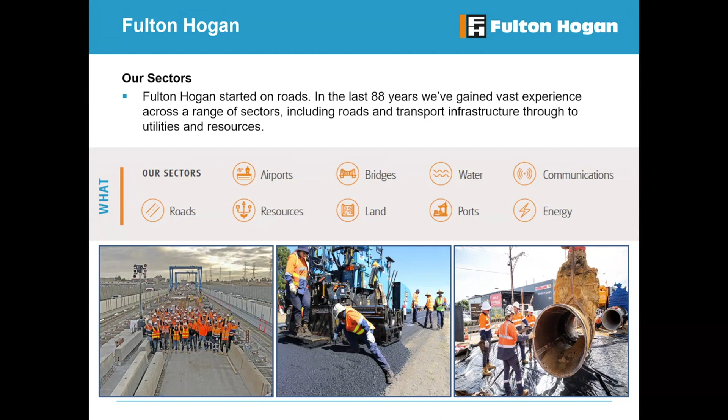CICA represents, as an industry association body, we have a national footprint with members from around the country that encompass crane owners or people that sell lifting services, as well as the crane manufacturers, and also the hook side of things, the rigging equipment, the rigging, slings, shackles, clutches, so on and so forth. Those providers as well make up our membership. So we believe we have a full spectrum of participants that can aid to improving safety in the industry.

One of those things that was a self-initiated program back in 2002 was the Crane Safe program, and hopefully many of you are familiar with that program. It continues to be a gold standard globally for independent third-party crane inspection itself. It's the only program that's accredited in Australia.

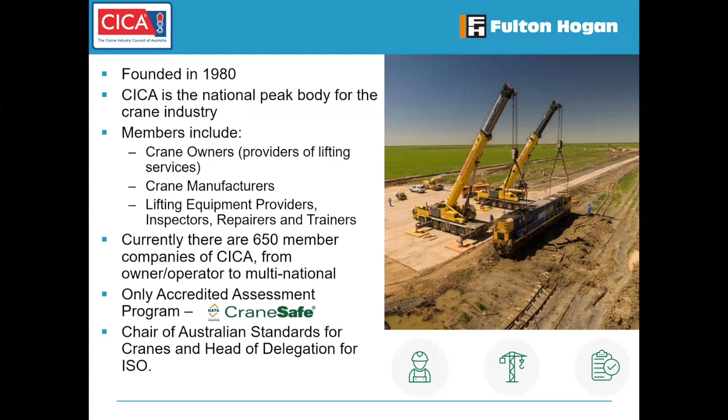With the footprint that we have in the membership for manufacturers as well as users, it's important for us to be able to contribute and raise the awareness and also the modernization of Australian standards. So we're very fortunate. CICA has the opportunity to participate at both the international level with ISO as well as being chairs of the local Australian standards, which do have strong linkages back to European and international standards anyway. I'll just jump into the specifics.

It was important for us, as Rory said, the articulated mobile crane is a very popular crane. Over 40% of the cranes that are mobile cranes in Australia are articulated cranes, but there's a bit of a legacy, I would say, in the perception. And I think that our hope today, when Tom and I and Rory looked at trying to draft this information, we want to raise your understanding of how articulated cranes or non-slewing cranes, the colloquial Franna crane, is used and perceived in the industry.

I thought it was important to start with this slide here because this indicates the legacy and probably the misconception of the non-slewing crane and the articulated crane that we'll use synonymously. So quick point here, if you can operate a slewing crane, so I've shown a license C2. This slewing crane is a little Maeda crawler crane that you might be familiar with. Most of them have a 2.8 maximum rated capacity.

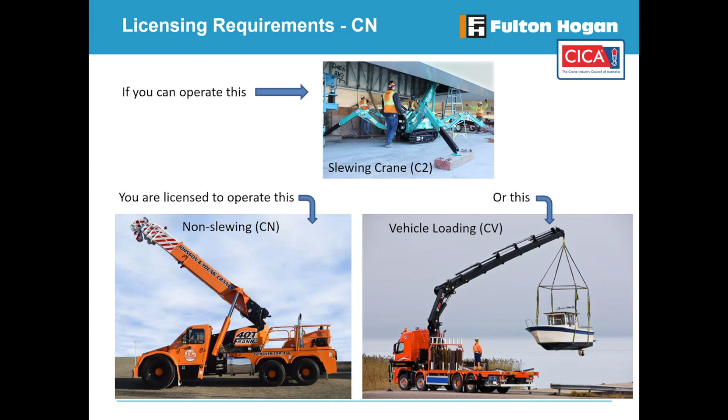The misconception in the non-slewing crane, articulated crane space begins in the licensing requirements. The fact that slewing crane licensees are legally able to operate the non-slewing cranes or articulated cranes leads to the misconception that a slewing crane operation is similar to a non-slewing crane operation. This is an area that CICA and Fulton Hogan are attempting to resolve through both the Safe Work Australia program of work around crane licensing, but also even in the current national assessment instruments, we're trying to elevate the state of questions as well as the units of competency to reflect current non-slewing cranes. We'll unpack that a little bit more in the presentation as we go.

First thing I'll do to attempt to shed a light on the differences or the variations that shouldn't be overlooked is let's look at how a slewing crane operates. What you can see in this slide, I hope, is first and foremost, it has a 360-degree rotational lifting capacity. All those numbers in that chart are ton rated capacities of a crane in that boom length and radius. If it's lifting over an outrigger, directly over the rear, or over the side, that lifting capacity is constant in a 360-degree chart.

What does that mean? Well, it means that in the course of picking and slewing, you're not changing the capability of the crane and its safety margin that's built into the rated capacity. Before we jump and compare the rated capacity chart of an articulated crane or a non-slewing crane, I just want to highlight one other point since I've got your attention.

If you see the two pictures at the bottom half of the slide, Tom and I wanted to express how adding a load to the hook significantly changes the center of gravity of the crane, and subsequently that change in center of gravity has an impact on the stability of the crane. The stability of the crane also impacts ground conditions.

If you look on the left hand here, at a minimum, you'll be able to notice that the center of gravity is rearward in vehicle position to the slew center. It's actually 1.06 meters behind, but it's also 2.4 meters high. 2.4 meters high matters when you start talking about any sort of side slope, or if you're in a barge application, the height of the center of gravity matters just as much as the horizontal displacement.

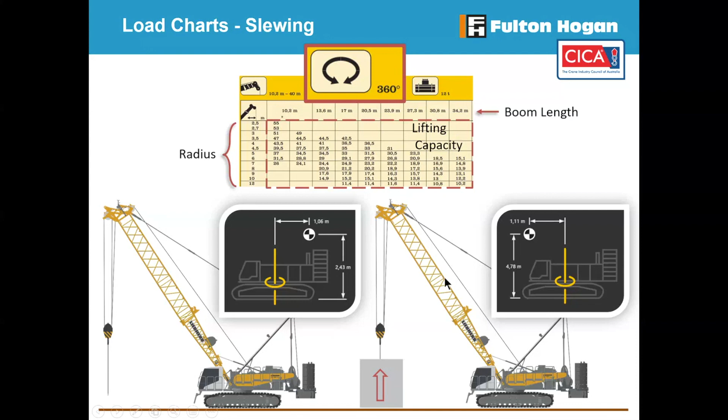The longer your boom, the higher that load center of gravity is going to impact the system center of gravity height. This is a very important thing, and these are physics that don't really care about the crane type, the job site, the state, the country, the continent, whatever. This is back to first principles, and understanding a basis for this for all cranes is very important to establish where incidents can occur and how they impact on things like ground pressure, how they impact on side slope, things like that.

Now let's shift gears, and instead of looking at a 360-degree chart, non-slewing cranes, by their nature, articulate. It would be preferable and probably easier for all of us to understand if we called them articulated cranes, not non-slewing cranes. In essence, if you watch this motion of this blue crane to the top right hand of the slide, you can see that's the full range of motion of that crane. There is not a 360-degree chart. It's approximately plus or minus 35 or plus or minus 40 degrees.

What's important in that is that articulation changes the stability of the crane, not because of ground conditions or anything like that, but because the stabilizing moment that's called out here in this top view diagram moves forward closer to a tipping line. So this top view diagram is showing that the tipping line is the front tires. In a very similar fashion, on a slewing crane with outriggers, the tipping line would be the box of the outriggers. But because these operate on tires, the tipping line is the front axle.

You can see between the straight ahead position versus the articulated position, that stabilizing moment reduces in articulation. The distance from here to the tipping line, if you can see my cursor, compared to that green line on the bottom picture, it's forward and closer to the tipping line. That reduces the stabilizing moment. What does that mean? Back to the load chart, you can see there's different rated capacities for different articulation angles.

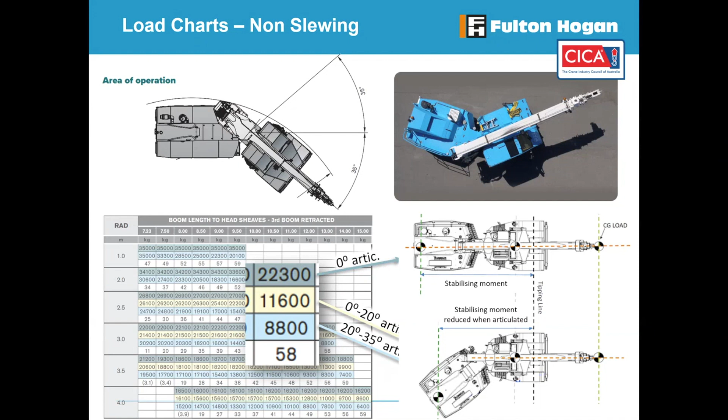And what we say to drivers out there is, tell me where you're going to go. Are you going to articulate to pick this load up? And if you are, have you considered the articulation, then the side slope? And that's the most important part. On the next video, you'll see the difference of how the behaviour of the crane and the boom happens when they get on a side slope.

Okay, so this is an indication of the crane, and pay particular attention to the block he's got. He's roped up for 4 parts of rope. That's heavily important when you're dealing with Frannas, because it does affect the chart going forward. If you have a look at the side slope, have a look at the hook block, it's out of the centre line of the crane. So the stabilising moment's already on the tipping side.

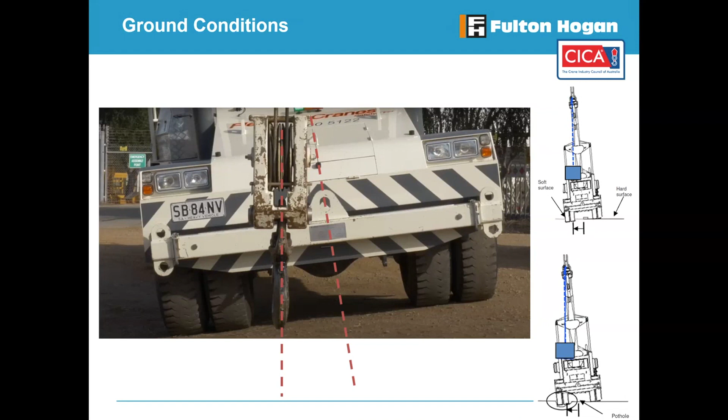So if you have a look at it, how it says the hard surface, there's certain percentages and degrees that you have to fall within the chart, and you have to look at that chart prior to your operation of the crane. This is what a lot of drivers don't do. Like Tom was saying, firm level ground is described in Australian standards and where load charts are derived from as anything between 0 and 1%. 1% is less than 1 degree of side slope.

But what you can see in this chart, you can see that this chart is applicable up to 5 degrees, or again, in an inclination percentage is 8.75. So anything over a 5 degree side slope should be considered a design lift and will have its own level of scrutiny and checks and balances associated with it, beyond normal operation up to 5 degrees.

Tom, I'll hand over to you as far as if you want to explain the chart, and then the video hopefully will give you a little bit of further discussion around how the impact of what's seen in this chart plays out. Yeah, so Brandon's not actually picking these numbers. These numbers are actually in the Australian standard. They're in 1418.

And if you have a look at the crane, you have a look at the degree. So the further the jib goes out, you've got a fly jib at the end of that, and it's going 10, 20, and 30. Then you start coming closer, 30, 40, and 50. Then it goes 10, 20, 30, 40, 50, and 60. If you have a look at that and look at the derations, the jib is out. The further you put that jib out on a side slope, the more you have to decrease that load chart. The centre of gravity is up the top. It's hanging off the centre of that crane, and you're in trouble.

If you have a look, you say 60, 50, and 30, and people always say, well, how come at the highest point you're reduced? Well, that's structural load indications of the fly jib, and she would only be on a single line. The capabilities of the crane lifting on single line is reduced significantly. If you go to the 50%, it'd be very rarely he'd be lifting on 4 parts of rope there. He'd probably be on 2 parts of rope, which means the purchase on the crane, and I'll explain that.

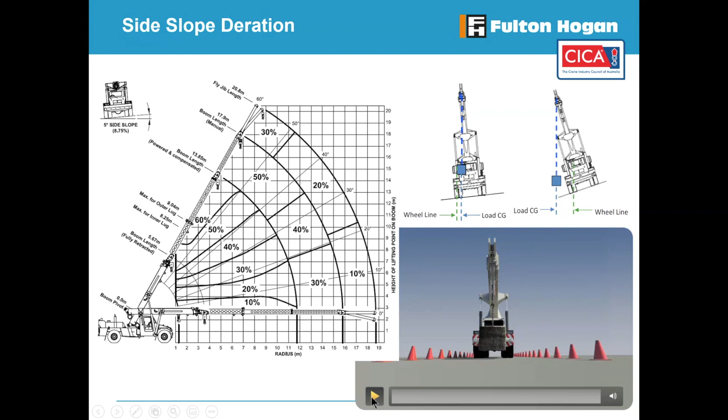And that should hopefully correlate to this chart of different rated capacity reduction. Just watch this video, and the video will go through an example of how to apply the reduction, and then we'll go through a worked example quickly.

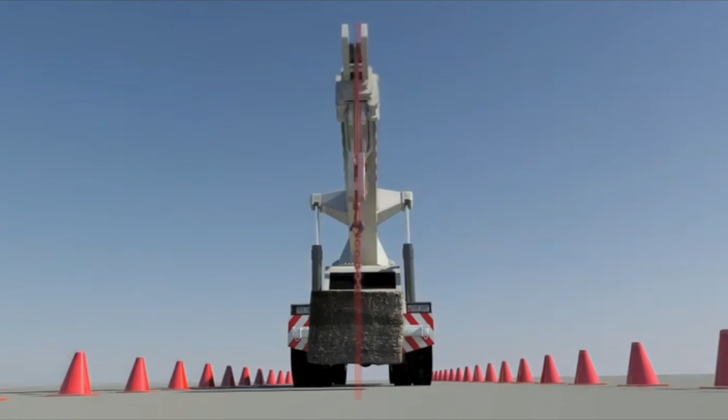Here we see a pick and carry crane on level ground with a load suspended from the boom. The load and its centre of gravity are within the stability base of the crane. But if the crane was on a cross slope, the load will swing outside the line of the crane's base, creating a side load, and the crane could tip over sideways. This side slope would not increase the working radius. However, the crane's stability base is decreased, as the crane's tipping line is now the wheels on the load side, not the front wheels, as in the facing downhill situation.

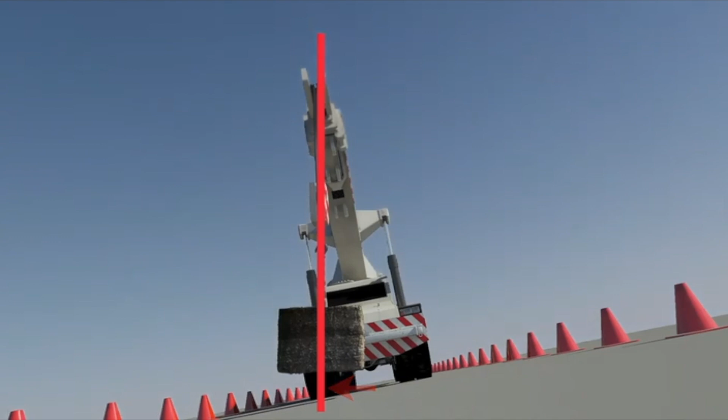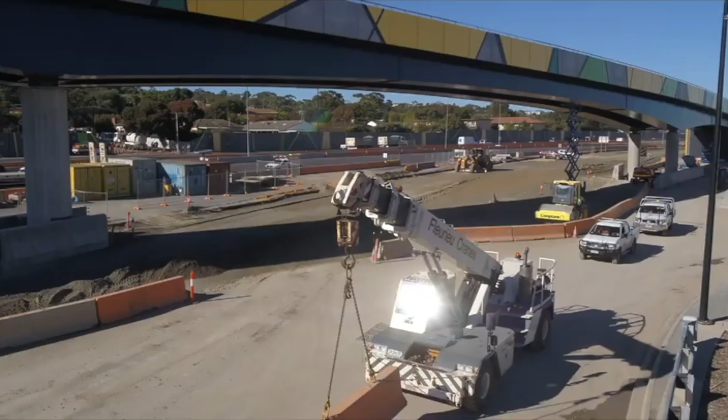And note how the side loading will increase the longer and higher the boom is. This is why manufacturers always recommend that when traveling with a load, keep the crane's booms as short and low as possible. Some manufacturers supply charts that allow the operator to determine a rated capacity for the crane when working on a known side slope. These charts show a percentage of deration required for the given boom length and angle, and the deration is applied to the rated capacity as read from the load chart.

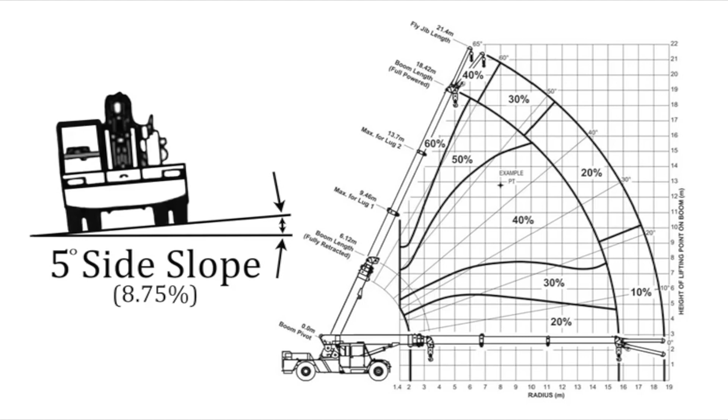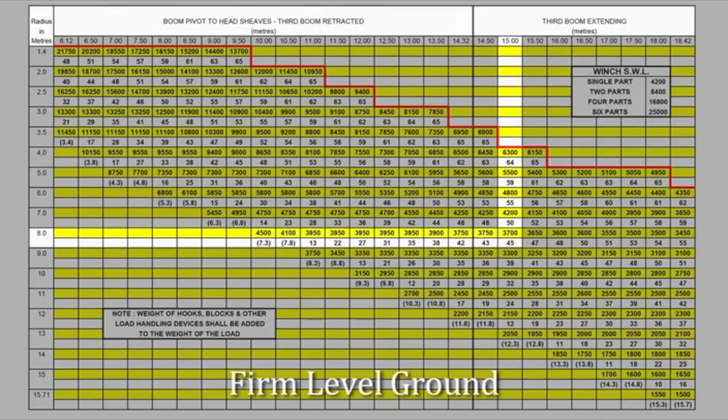For example, using the chart shown, with a 15-metre boom length at a loaded boom angle of 45 degrees, the rated capacity of the crane is 3,700 kilos, if it is slewed greater than 10 degrees. This rated capacity assumes the crane is working on firm level ground. But if the crane was on a side slope of up to 5 degrees, the deration chart shows for a boom in this position, the rated capacity must be derated by 40%.

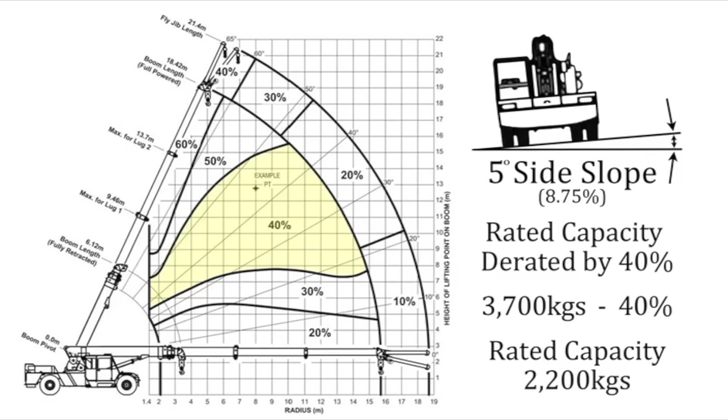So 3,700 kilos minus 40% equals a rated capacity of 2,200 kilos, a reduction of 1,500 kilos. This is the maximum load that the crane can lift to stay within safe margins. Otherwise, you run a real risk of overturning the crane. And the rated capacity will be even less than this if you slew the crane more than 10 degrees.

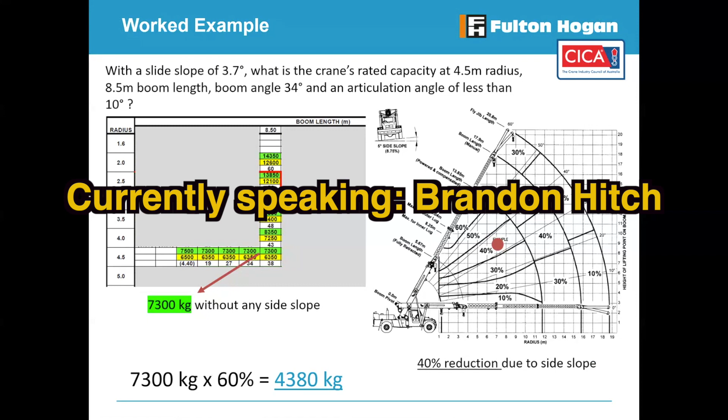All right, hopefully that video helped depict a little bit of what happens when the boom is extended and why that rated capacity chart shifts from 20 and 30% to 30 and 40% as you extend the boom. Tom, do you want to walk through just a quick rundown of this example that shows the crane on a 3.7 degree side slope? So it is more than the 1%. So we should be applying the side slope chart.

Yeah, if you have a look at it, if you go to the 4.5 radius, it's indicating 7,300 kilos. Then you go to your side slope chart and you're looking at the 40% reduction. You have a look at what your reduced rated capacity will be. And always remember in the rated capacity that you must include the hook block, the rope, and whatever rigging gear you've got in it is another further deduction, which people don't seem to do out there on site.

The boom angle's 34 degrees. And I say to people, don't worry too much about boom angles because you have to go to this chart and then look at it. The best way to do this chart is to look at the radius and look at boom length.

And what Tom's talking about with that 40% reduction, that means when you look at the non-side slope rated capacity of 7,300 kilos, you take that times 60%, because that's the 40% reduction from 7,300, and your overall maximum rated capacity after all the deductions are included, like Tom's discussing, where you add the hook block to the weight of the load, you add the rigging to the weight of the load, the most you can pick up is 4,380.

If you consider how much that changed by 40%, and we also saw that on the AT40, you had over 60% change in straight ahead to articulated, you start stacking all this up just to reinforce. If you're picking up straight ahead on flat level ground and it's in the green, articulating or going to a side slope can quickly put the rated capacity at or above 90% and engage that amber or orange light, or in some instances, engage the red 100% capacity light.

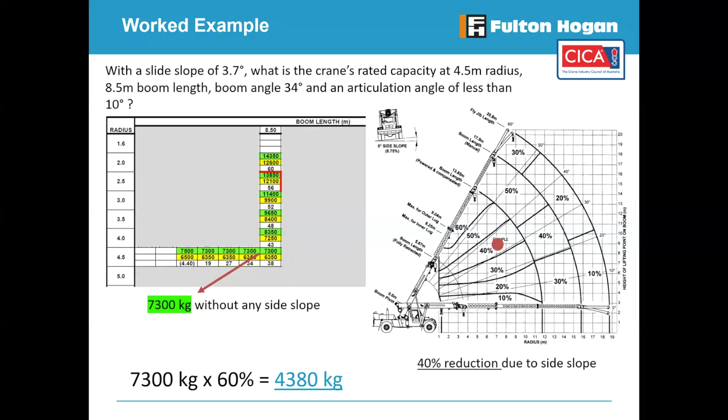I realize we've had a very abbreviated time to digest what I would consider certainly a very, very important matter about considering side slope, but also to a novice that's not overly familiar with these type of things, you get lost easily in the terms alone. So I apologize for that, but hopefully we can unpack some more detail in the question and answer time.

We were just talking about also including a little bit of what's next. While we've talked about side slope, we've talked about rated capacity, all these type of factors, it's really highlighted and focused only on the site-based activity. For the articulated crane space or the pick and carry crane space, what's up and coming in the future is a consideration for on-road driver licensing.

Historically and at this present time, it's only ever required a medium rigid for some states or a heavy rigid truck license to operate these type of cranes on road. What that license generically fails to do, in the same way that a slewing license for site activities fails to do, is consider the impact that an articulation joint instead of conventional steered axles has on the maneuverability of the crane.

This is a project that's been underway for the past 12 months with Austroads, and NHVR has been working since pre-COVID on modeling vehicle behavior in response to a coronial inquest up in Queensland. So there's work being done on this, and it'll likely lead to an on-road component to heavy vehicle license for articulated cranes. CICA has been involved in this process for quite some time, and like all processes, it sometimes can take too long for what could be a simply identified risk to resolve.

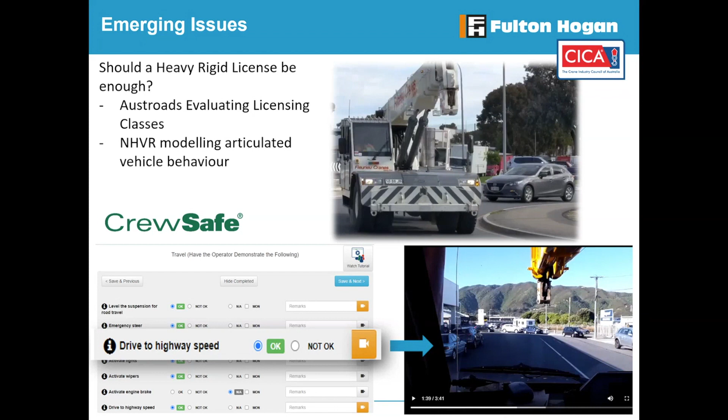I think there's plenty of information in there, even in such a short period, that we can take away. And I think it's really provided a lot of insight into the safety risks of articulated cranes. And what I hope we've provided is some food for thought as to how you may currently operate your cranes on site, as well as the types of questions that you may now need to start asking your crane contractors on site.